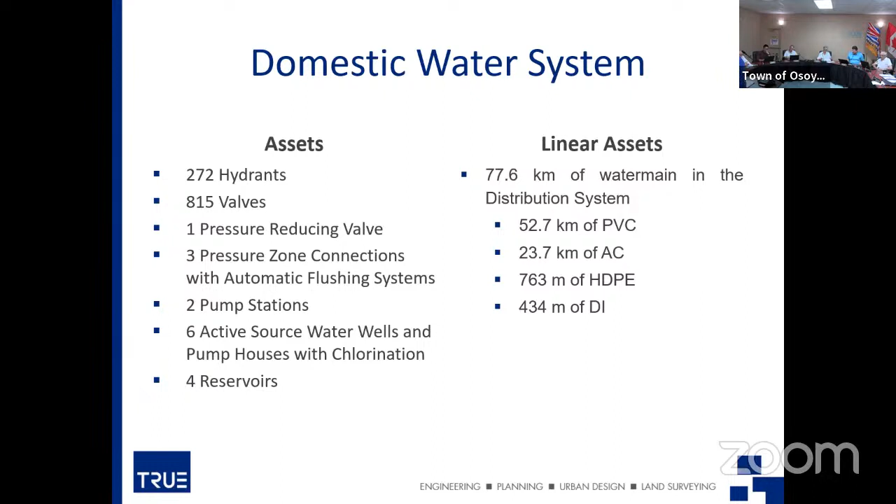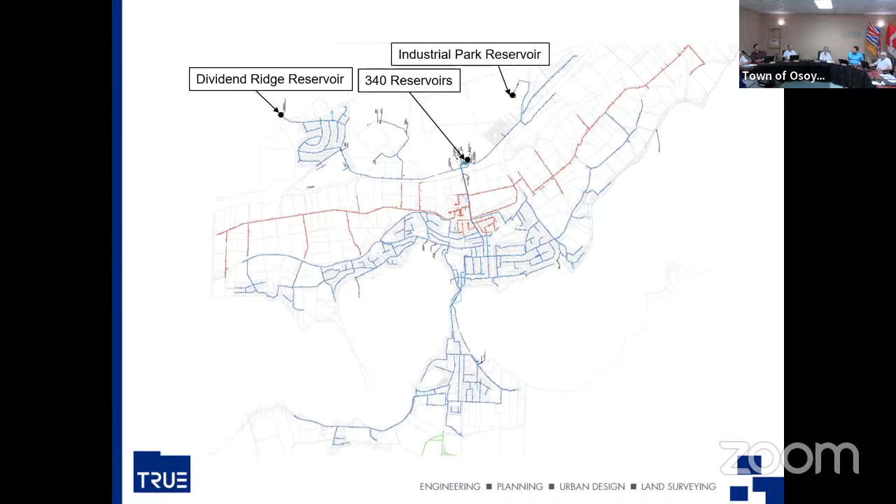This is probably the most important slide we're going to look at. It shows all your pipes, when they were built, and what material they are. What I want you to focus on is all the red pipes on the left hand side - those are all AC pipes. They have a published design life of 50 years, and they were all built more than 50 years ago, some 60, some 70 years ago, mainly 60 years ago - but they're all past their design life or approaching the end of it. The rest of your pipes, you can see a bulk on the far right hand side that are all new PVC pipes with a much longer design life, so they don't affect asset management as much right now. The pipes in the middle are generally PVC as well if they're blue. The other colors that are hard to spot are some ductile and HDPE pipes, representing a very small percentage of your overall pipes. But really, the red ones are going to be causing us a challenge in the next 10 to 20 years.

If we're lucky. These are locations of your water sources. We have 6 wells, 3 on the east side, 3 on the west side. Well 6 is located up in the Lacey Point area - it's the most separated from the rest.

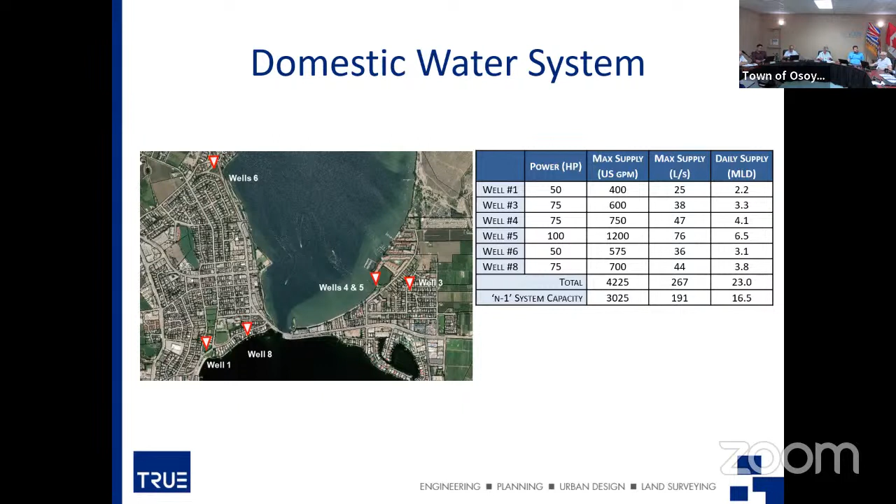But your actual capacity, what we're actually getting out of the wells, is lower. That's the key piece of information we didn't really realize till we got into this capital plan and analyzed your flow data. Some of these wells have degraded and we haven't rehabilitated them, so they're putting out water at a lower rate than they could be. Or the pump within them is just undersized and could be improved.

That's the case for wells 4 and 5. You can see they're slightly under what they could do. We could install larger pumps, but those pumps are actually doing what they were designed to do, so it's not like they degraded over time.

Back to the reservoirs, this shows the total storage of our reservoirs is 6,000. But note the 340 reservoir at the very top was built in 1965. It has reached the end of its life as well when you talk asset management. That's highlighted by the fact that we've been working on a plan to try and rehabilitate the valving within it. And the cost of that rehabilitation project has been staggering, you know, $10 million. It shows you we're working on an asset that's actually at the end of its life.

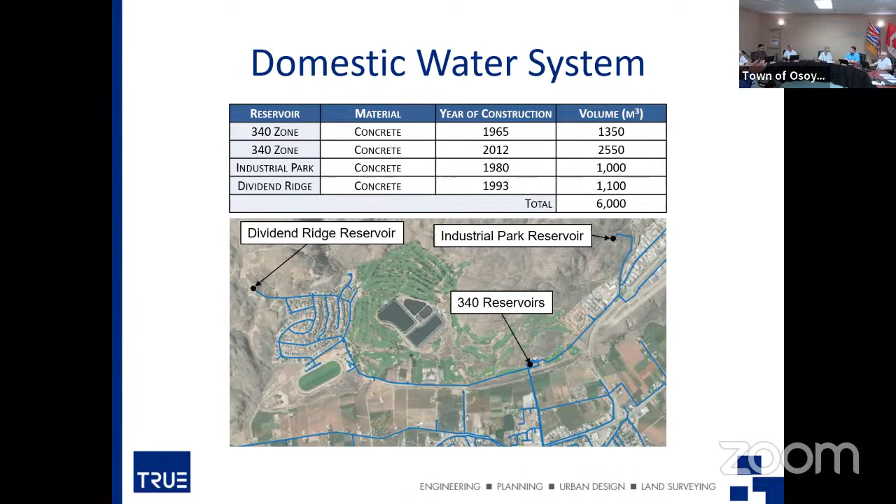Finally, in the existing system, we have manganese. Of all our 6 wells, 2 of them have low levels of manganese, well 1 and well 3. All the rest of the sources have manganese above the maximum allowable concentration for the Canadian Drinking Water Guidelines, and this is causing constant problems operationally.

In the last 5 years, more chlorine is being added to the system at IHA's request. We're chlorinating more, which makes more manganese precipitate out, which causes more cloudy water and more buildup in our reservoirs and pipes. It's becoming almost a nightmare, it just keeps accumulating within the system. Every time we do work within the system, we stir it up, and it takes a long time to try and flush it or calm it back down.

It also allows bacteria to grow within this buildup of manganese deposits within the walls of the pipes or the floors of the reservoirs, and it creates more challenges for the operators to try and keep the system working in a healthy condition.

That's the system. So then we try and skip to asset management, and that's maybe new to council. We don't really have a current asset management plan that I'm aware of for any of our assets where we're fully funding for their replacement or planning for their replacement.

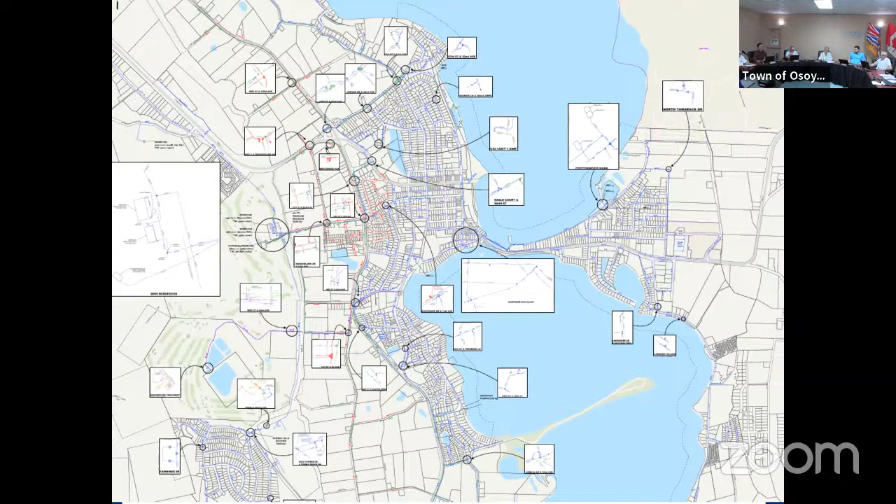It was amazing how different sources of information have different data, and we had to try and splice it all together, but we now have one place where it's all housed and it's all up to date.

The asset management plan, after we did that for the pipe section, the risk-based analysis shows that 4.1 kilometers of pipe is where we really want you to target your money first. This AC pipe is what we're determining to be high risk. We then follow that in the asset management plan with medium risk. We don't actually even get to the lower risk stuff in this current plan, but some of it will come up, as some of those pipes will start breaking to the point where replacement is better than fixing them continually.

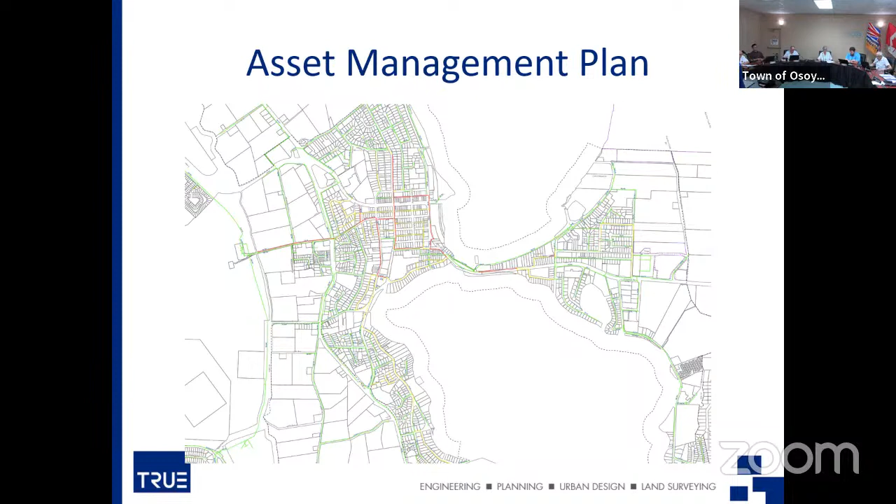You can see there's a red pipe down 89th Street. Previously, we had a presentation about a road design on 89th Street, so there's some synergy there, and we can start aligning our capital plans to make this better. These projects are going to be concentrated in the downtown core because that's where the 1960s pipes are currently sitting, along with some of the larger ones.

A key point here is 20% is road restoration. So one way to try and make this better is to try and align these projects, because we can save 20% of the cost if that road is already being repaved. We won't be able to do it perfectly, but we'll make a slight improvement by having projects that do align.

At the very beginning, there's a $10 million figure that represents the fact that these are pipes already at the end of their life. We can't show them further out because they're past due. So there's already $10 million worth of pipes that should have been done in previous years that aren't done.

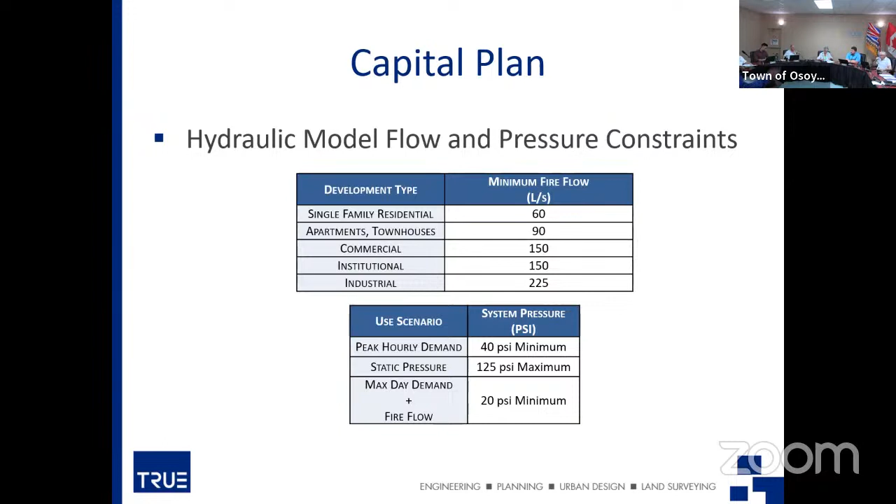Looking at your reservoir, remember earlier you have 6,000 cubic meters of reservoir storage, but 1,300 cubic meters may be retired if we don't rehabilitate or renew that source. In 2043 it's looking like we need 8,200 cubic meters of storage, so if we kept going with current status, we'd be adding reservoir capacity. The capital plan though recommends something the town's already doing - bringing standby power to the wells to offset some of the need for emergency storage imbalance. So instead of building more reservoirs, the capital plan supports continuing with generators at the well sources and reducing some of the storage requirements - thus our storage is adequate.

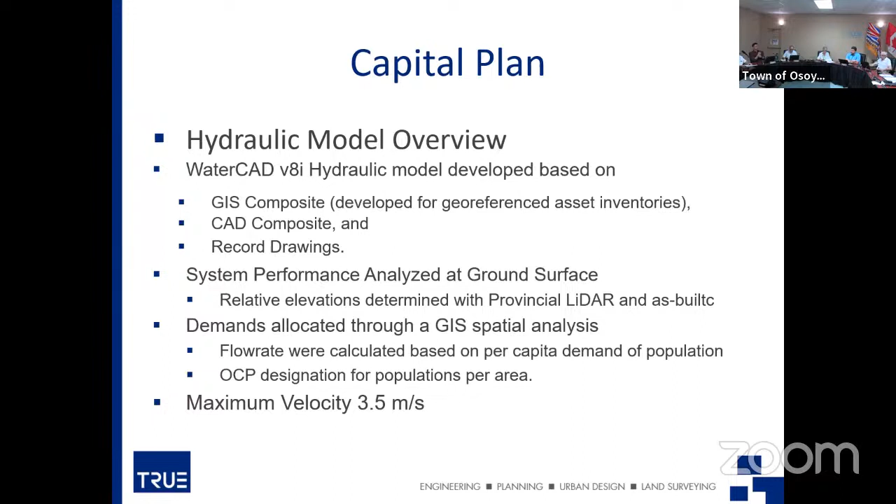So we then built a model from that GIS system - these things talk equally to each other. We were able to overlay the OCP for land uses and generate a water model from all this data we compiled, run it, and then apply these growth scenarios to see what happens with the distribution system and the fire protection ability.

One thing is that rural areas have a level of fire protection assigned to them that's more appropriate for a rural area, and the standard is applicable if homes are 30 meters apart and it was recently built and designed. It all works. So when you look at these figures, we kind of chop off the rural area, but it's not that we're ignoring it. It's fully compliant, or it meets all these standards. So it helps with the visuals.

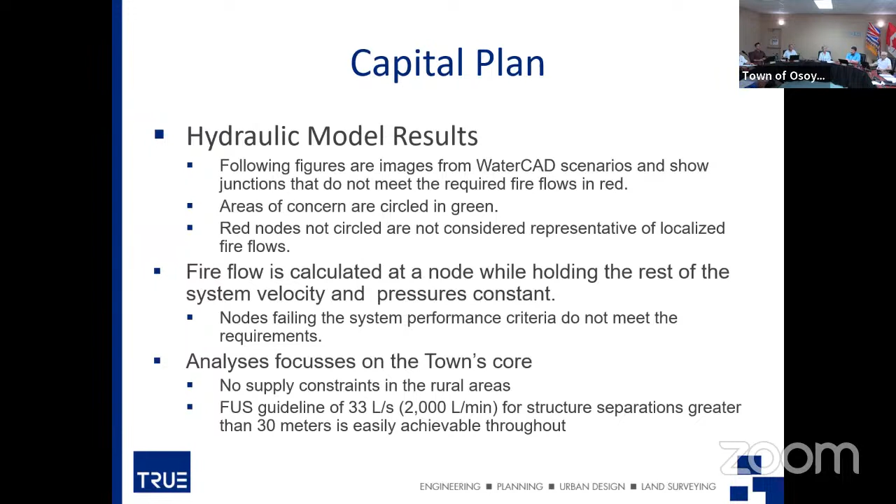In this first set of slides, we run two scenarios: how the system is working right now, and then how the system would work if we assume we're allowed to run our pumps. Without the generators we assume the pumps are off, but with the generators on we can make more assumptions that the pumps are running.

These red dots are all the fire hydrants in town that would be considered non-compliant to the criteria we prepared. This shouldn't be cause for panic. Just because we produced criteria based on zoning, something zoned commercial or industrial, like the industrial park by the airport, meant a higher fire flow requirement of 225, and the modeling software spits it out as a fail. But the industrial park wasn't designed for 225. It will never have it unless we replace every pipe and the reservoir, and that's not going to happen. It was designed at a different time with a lower fire flow. It will always have that lower fire flow, and it's an acceptable amount for the day.

When people build things, we tell them what's available, not what's going to be there, so it's not a problem. Same with Lakeshore Drive, it's all red. When people do developments there, we tell them what's available. They don't get to assume that because it's commercial they get 150. They only get 60, because that's all that's available down Lakeshore Drive.

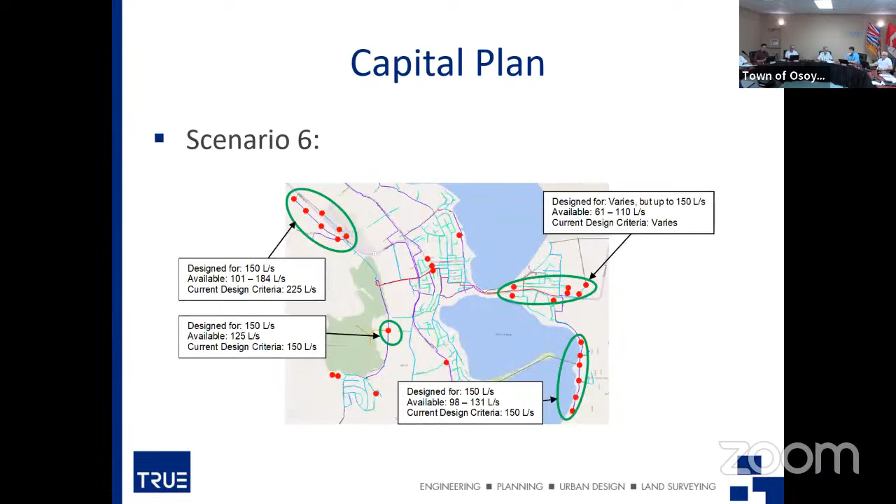So then we had to figure out, well, how do we implement more sources and at the same time treatment, because we can't bring on a new source without treatment, and we need to bring on a new source. IHA will not let you bring on a non-compliant new source. So when we drill well 9, it has to be fully compliant with Canadian Drinking Water Guidelines. Well 9 is most likely going to be located at Maple, and it literally has to be brought on now.

Well 4 and 5 are two of our largest wells, and they're proximate to Maple. So what we've tried to do is develop a capital plan that recognizes you need to fund this to try and make it less of a burden, but it is really ambitious at the beginning because you need a new well, which means you need a treatment plant. You can't defer those, so you have a huge capital outlay at the very beginning.

And then we're trying to be most efficient with your money to bring on other aspects as needed, while taking on some risk. So we've tried to phase it in, and our focus on the phasing plan is dollars spent equals most megaliters per day. I'll try and point this out to you.

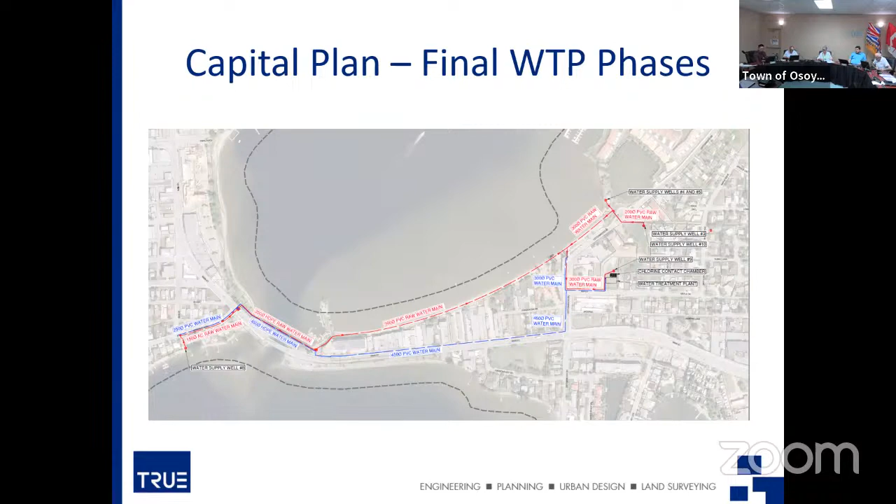Where do you plan on putting the treatment plant on that Cottonwood property? I've heard different things said, one being that the town got that property and was supposed to develop low-cost housing on part of it. I don't believe that was the case. I think the property was given to us to use as we thought best. Am I correct in that? I think so, there was no proviso given to us when we got the property. That is correct, thank you, Mayor McKortoff.

Okay, so using the laser pointer, the black rectangle off of Maple, below the red circle off of Maple, you want me to walk over and point? Can you see here?

This rectangle, right, that's for the purposes of this plan. That's the treatment plant. It doesn't have to be there. That's just us showing how it works, and we're trying to produce cost estimates. So that's where we located it. The Cottonwood property—

which is up here, there's two pieces of property there. There's right now well 10 shown on the Cottonwood property, but it would just be a well and then a pipe. That piece of property is fully available to be redeveloped as whatever council chooses.

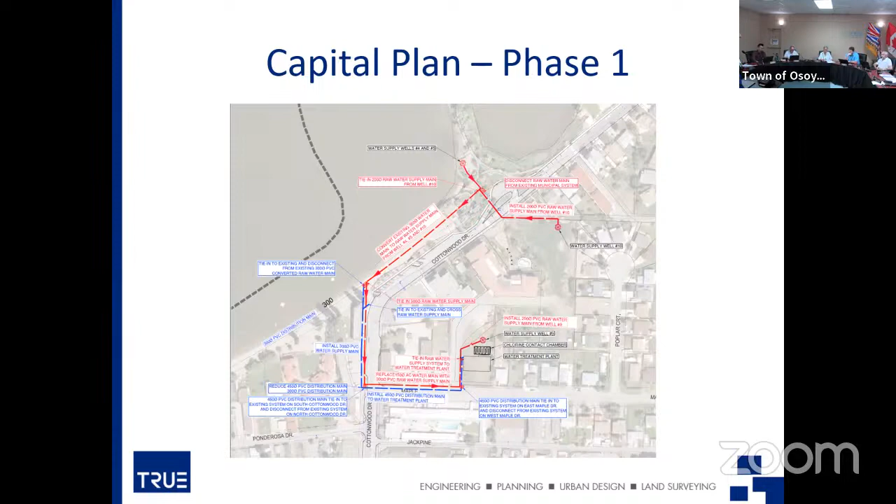Also in the capital plan are two other projects, and we've moved them way out to the year 2040, 2043. Part of the reason is that we actually see them as partially, if not majorly, developer driven. Some of this is our work with the OIB, who want to be developing in the Nk'Mip corner and in their campground area, adding units.

There is some synergy to working together. One of their projects will trigger a reservoir on the east side. We have a reservoir that's aging out. There's synergy in working together to help them with their project by softening the load on one of our other replacement projects. So we put them in the plan.

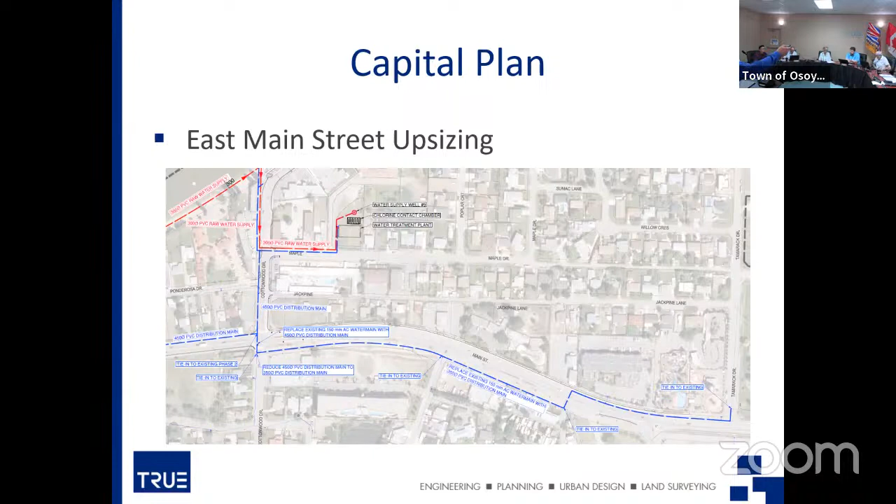We haven't fully worked out source of funds at this time, as to what percent would be allocated to water users in the capital plan versus what would be assumed as paid by developers or DCCs. So that's what this piece of the water main is, and the next slide shows an east sector reservoir.

This project isn't required by our capital plan, but if the OIB triggers it, we can make it work and be beneficial to our capital plan because of our other infrastructure. It has synergistic benefits to fire protection and emergency response on this side should we ever lose the crossing. This reservoir has some benefits we can use, but it would definitely be triggered by development the band would want to do, and an agreement we'd have to strike with the band that we don't quite have yet.

So when you look at the total capital plan, it's $22 million worth of projects that we're projecting over the life of the capital plan, which is 20 years. That shows all three phases of the source water and raw water, and those three distribution system upgrades that are key to keeping everything going to meet growth. It also shows some contribution, not the full actual cost, of those East Sector Reservoir projects that are likely to be synergistic with the OIB, so that we get a realistic total dollar value of the plan.

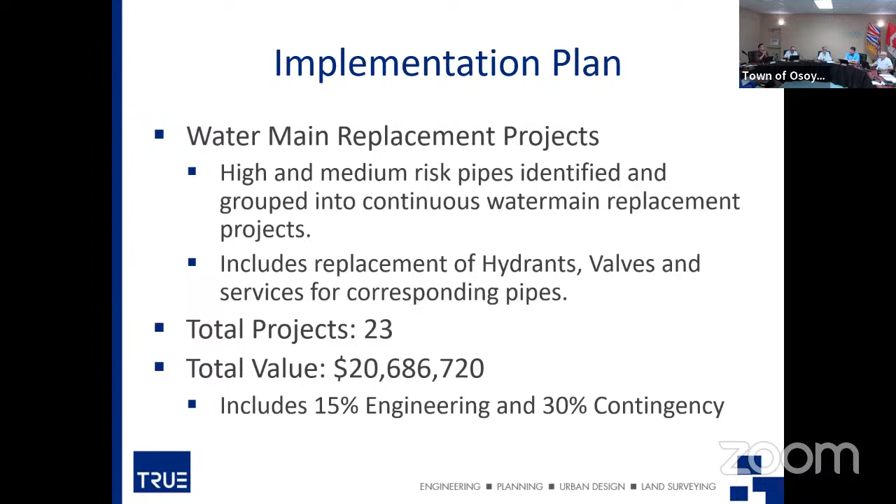We put a cost to all of the proactive projects, and we ended up coming up with 23 of those. This includes reducing dead-end mains, putting in automatic flushing, and adding more monitoring in the system so the guys have a better real-time idea of the system's condition or water quality. We have 23 projects throughout here, which will each get a descriptor not currently in this draft but in the next version, for a total of 20 million.